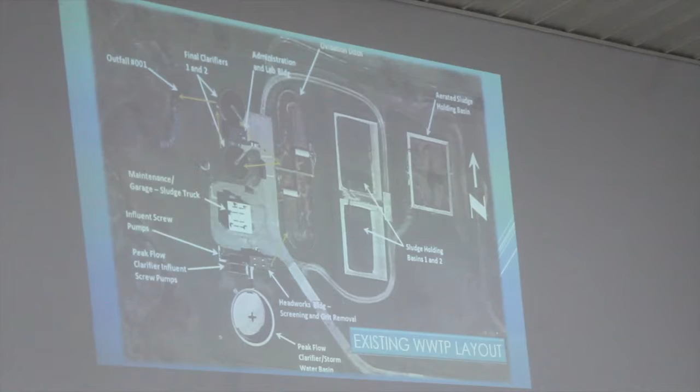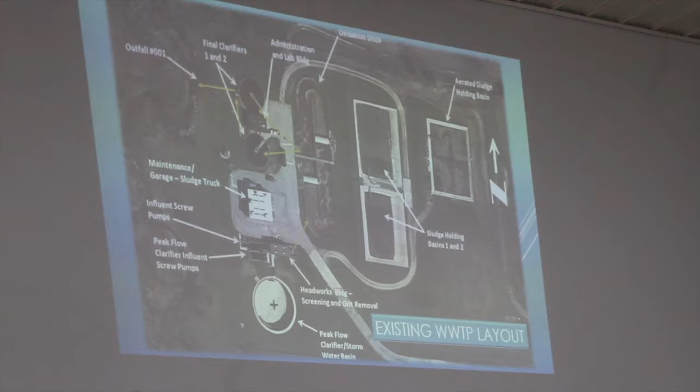Okay, this is an aerial photo of what the treatment plant looks like. And you probably can't read any of those small words, can you? So, down in the lower left, it says peak flow clarifier influent screw pumps. And then right above that says the influent screw pumps. That's where all the lines come in, and that's where the screw pumps are, and it's pumped up. If the flow is over 4 or 5 million gallons per day, it flows through the stormwater screw pumps and comes over to that big basin down at the bottom of the screen.

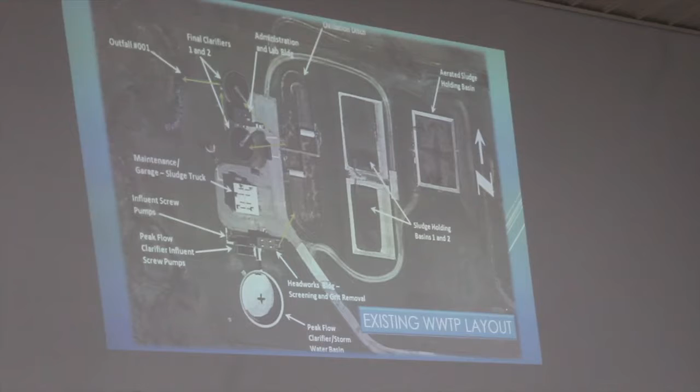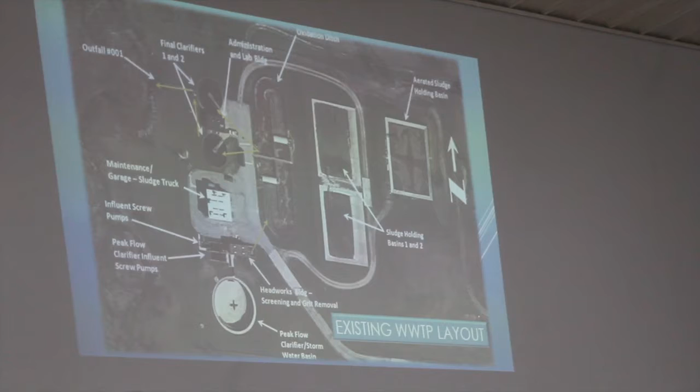The regular wastewater, when it's treated, is pumped up into that building. It's right down at the bottom, right above that big circular basin. And that's where the mechanical screen is and the aerated grit chamber. From there, it flows, if you look closely, to a large, skinny, kind of an oval shape. It's called an oxidation ditch. It's kind of hard to see back there, I'm sure, but that's where the biological treatment is. Most of your treatment occurs in that basin.

It flows from there over to the side to your left, where there's 2 small clarifiers. And in those basins, the sludge settles out and the clarified water goes on out to the creek. We're looking at continuing the extended aeration process, and the oxidation ditch is one of those types of systems. That's the extended aeration activated sludge process. Again, 2 million gallons per day for design. And we're going to have it set up to handle peak flow through the plant of 8 million gallons per day for extended periods.

A short period will be able to handle 12. And then we're also going to have a peak flow equalization basin that will be able to handle all other flows. And if we get enough inflow and infiltration taken out of the system, hopefully we won't be needing to use that too much, and maybe we can cut back on the size of that.

So all the lines will come in at the same point they are. Well, they'll be coming to that point. We're going to extend them on over to that great big square at the top that represents the flow equalization basin, because we have to have an influent pump station because of our elevations that we have. So what we're going to do is go over there.

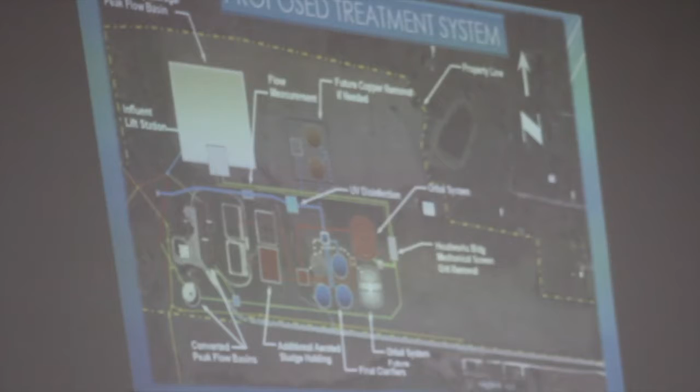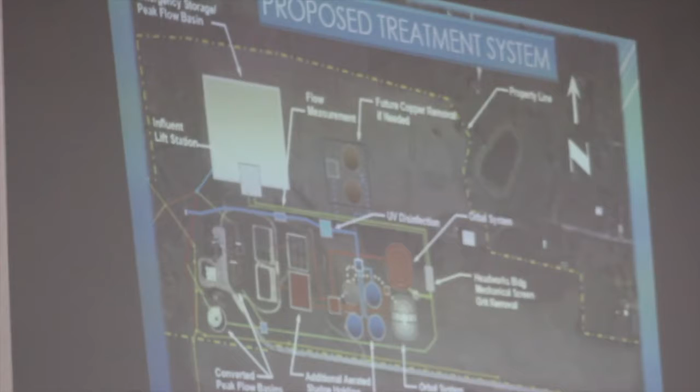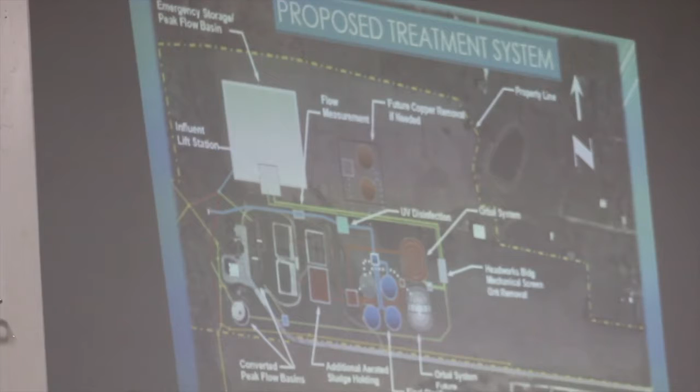We'll have a large pump station there and pump up the hill to the new treatment facility, which is over on the right. It's similar to an oxidation ditch, and basically you can call it an oxidation ditch, with several different tracks around it. The way those are set up is whenever your flows get high, you can cut off flow from them to your clarifiers and allow the high flows to go on through. That way you can still meet limits at a higher flow. So that's the advantage of using this type.

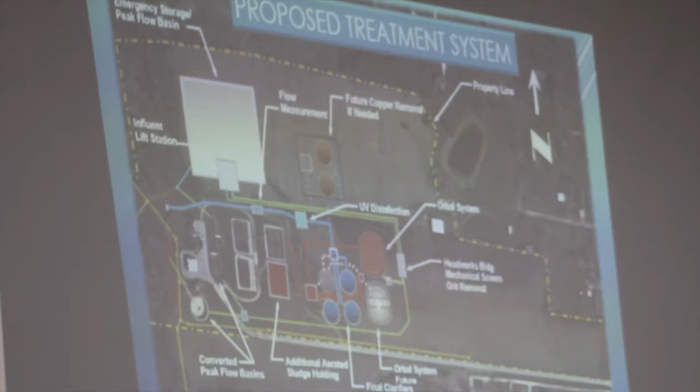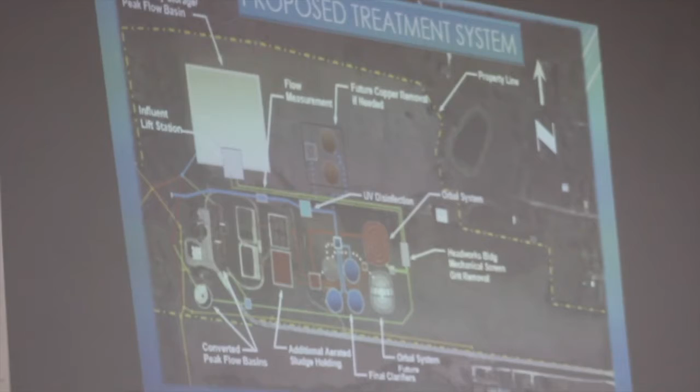There's also 3 clarifiers shown down there in the lower portion, and we're looking at adding an additional sludge holding basin. We're going to use as much of the existing facilities we can. The existing oxidation ditch will be used for peak flows, or it could be used for sludge. And the same with the existing clarifiers, and the same with the stormwater clarifier. It just depends on what our needs are at the time.

We're going to be able to use them to handle future flows, future sludge issues. The concrete, as long as it's constructed properly, which those basins are, lasts a long time. So we might as well utilize them as much as possible. Can we put it off? It has been punted a few times, and it's to the point now it cannot be punted anymore. Yeah, because pretty soon we're going to have to be spending a lot more money just to keep the existing plant afloat. We gotta get it fixed before it just conks out on us.

And we've already lost that one grant for that community, and that was in my presentation. I didn't bring it because I couldn't see my screen very well. But yes, we lost the grant that would have allowed us to pick up that subdivision over on Route Y, over there by the Y building. We were trying to provide sewers for them, and the city was going to get the grant and be able to do the project. It was 100% grant too, but since our treatment plant's overloaded, they wouldn't allow us to do it. It would close up a lagoon. They're having problems with the lagoon.